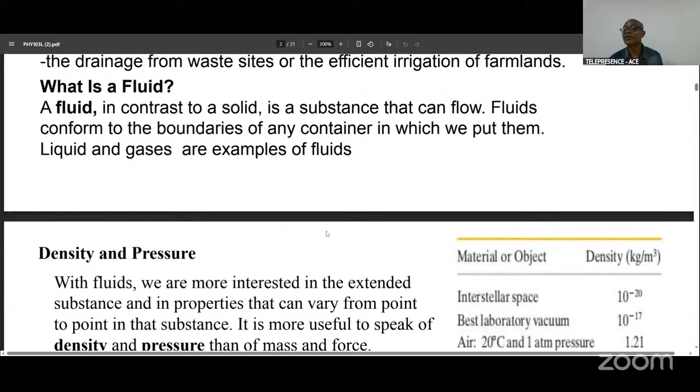Good morning, class. Sorry for that delay. Today, actually, we'll be interacting more, trying to put to action some of those expressions that we have already, getting you acquainted with them so that you are good to go by way of being able to use them effectively to solve questions. So let's try to complete our slide.

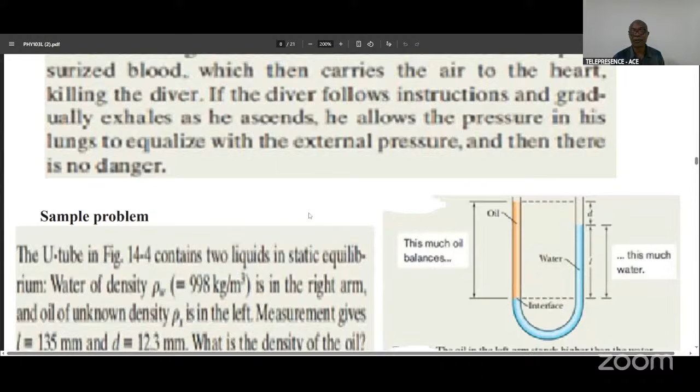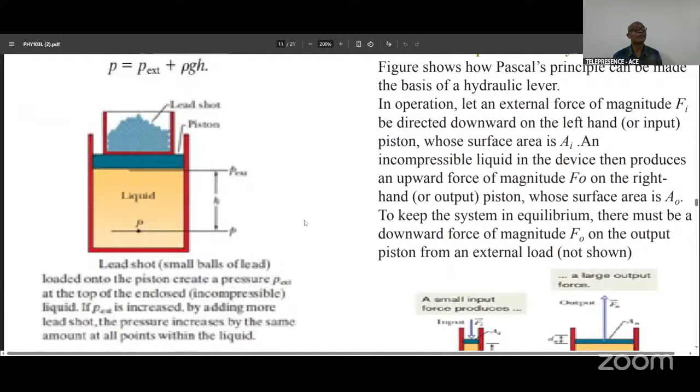And today will be very, very important, at least for as many of you that are able to actually attend the lecture. Because really we'll be taking time to solve some problems, problems that I know will be very useful for you. Problems that will be very relevant, that if you remember it will help you. So we are going to slide.

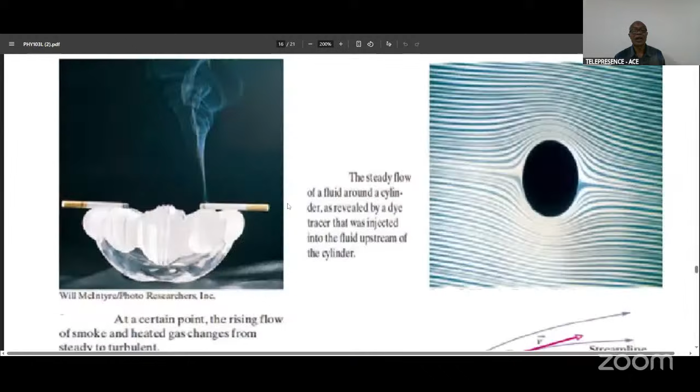Last time when we were having a lecture, there was a power outage. I pray there won't be power outage today so that I can have a smooth lecture. Towards the end of the lecture, we had a power outage.

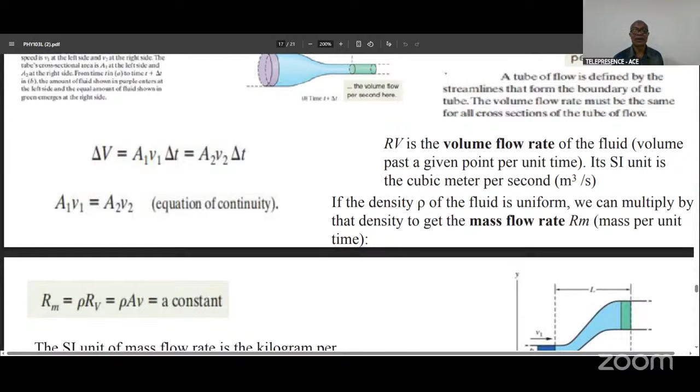So this morning, we'll talk about the flow rate being constant, arising from the equation of continuity. And then, of course, we also have the mass flow rate also being constant. So these are the two equations that we have on the board.

Equation of continuity trying to tell us the volume flow rate, and then the other one talking about mass flow rate. And of course, the SI unit of mass flow rate is the kilogram per second.

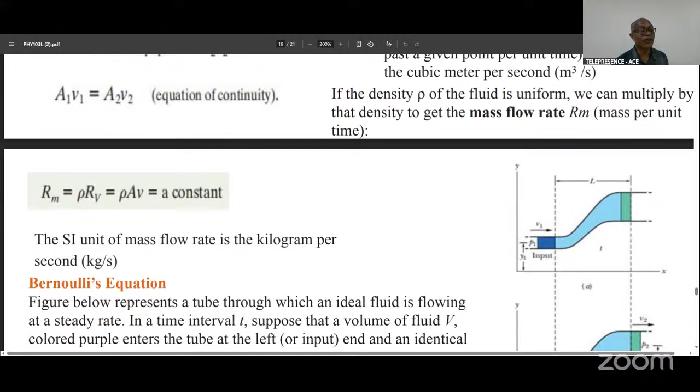Okay, so let's move on. So we have the mass flow rates, and that takes us to what we call the Bernoulli's equation. It's applicable to what we have on the right. I have a figure on the right hand side, and that figure is trying to show the flow of fluid through different sections and elevated at a particular height, y. That is, one is on one level, the other one is on another level.

So you can see there that we have the blue part, the deeper blue. That's where we have the input. You can see the level, that's y1 in figure A. After moving the distance L, that's capital L, it has now moved to a higher level, say y2. That is at an instant t, and then at a later time of flow of that fluid, at t plus delta t.

So if you look at the volume V, colored green in the figure, it emerges at the right end. The emerging volume must be the same as the entering volume because the fluid is incompressible, with the same constant density rho.

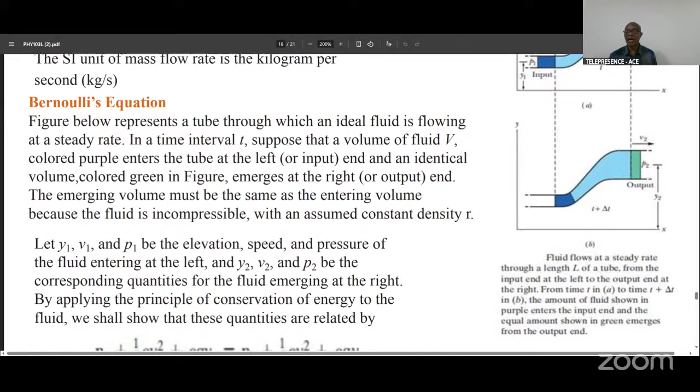The amount of fluid shown at the input will just be equal to the amount shown at the output end. So in A, we have the input end, and then in B, we are looking at the output end. So there's an equation due to Bernoulli, and that equation says the pressure at level 1 and the kinetic energy density at that level plus the potential energy at that level.

So Bernoulli equation, you must take note of that, actually tries to relate pressure with kinetic energy density and potential energy density. I'm saying energy density because instead of using mass, as we all know, for a solid, when I want to write the kinetic energy for an object, I just say half mv squared. But if I'm talking of a fluid, it's not just that mass, it's mass per volume. And mass per volume is what? Rho. So instead of M, I'm now using rho.

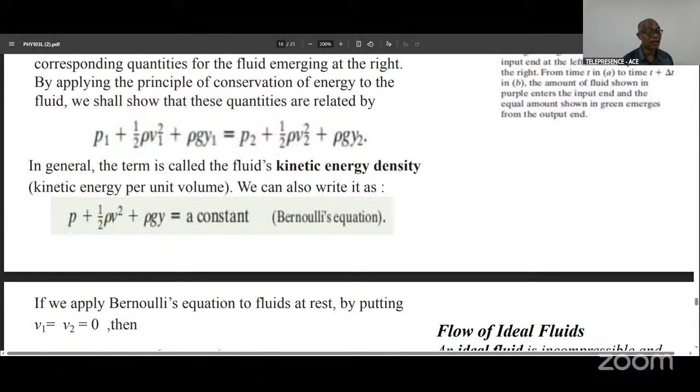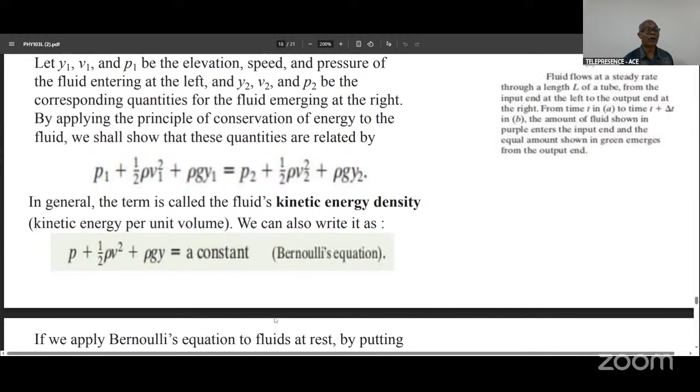And of course, again, if you apply Bernoulli equation to fluid at rest by putting, say, velocity is 0, what happens? Let's go back to this expression. In this equation, if the speed of the flow were to be 0, at rest, this expression will reduce to our previous expression. Do you agree with that?

Because I will transfer the potential energy density to the right-hand side, and the pressure to the other side, and the kinetic energy density will be zero. So what is left is the potential energy density on the right-hand side and the difference in pressure on the left-hand side. And that will be like what we call the gauge difference or the gauge pressure. In which case, let me try to write that expression.

I don't know if you can see the paper I'm holding. Can you see the paper I'm holding? I want to write something on that paper so that you can see. There's an expression I want you to be conversant with, and I'm going to write it on that paper. I don't know whether you can see this. Change. Can you see what I wrote there?

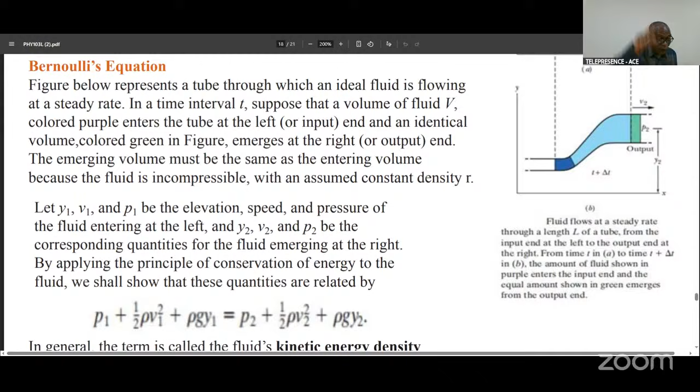That is change in P. Change in P is equal to rho GH. What I want to just say is this expression is similar to the expression we saw before. Let me show you the expression that is similar to it that we had before.

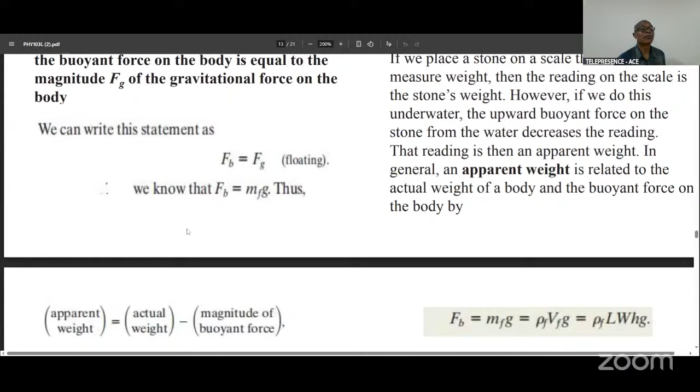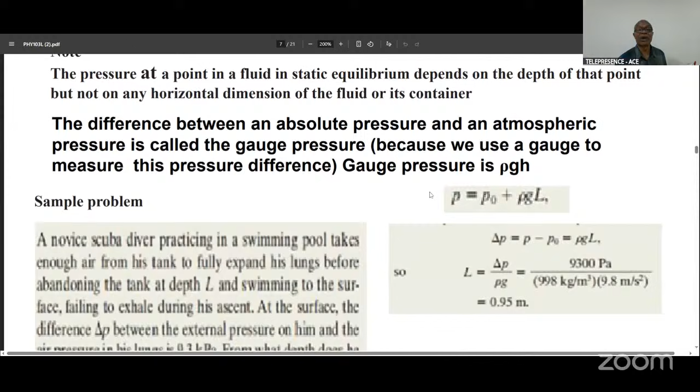We have an expression before that is very similar to that Bernoulli expression. If the fluid is at rest, it's just similar to what we have here. I don't know whether you can see what I'm trying to put the arrow for you to see. That is, in that Bernoulli, we are saying P1, this is P2, and V is 0.

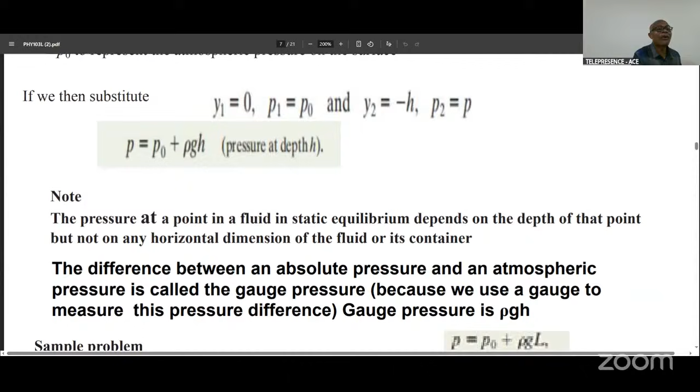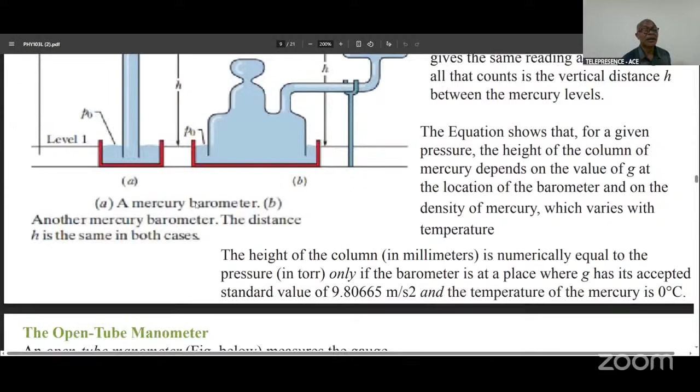So by the time you take rho G Y1, you take it to the other side, it will be rho G (Y2 minus Y1). That is, you factor out the rho and G. So Y2 minus Y1 is just H. So this expression that we have here is a consequence of, or is inherently embedded within, the Bernoulli equation.

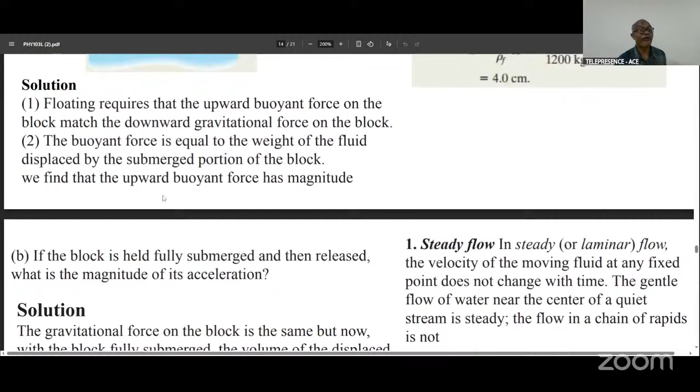So the Bernoulli equation is just a general form of equation that before now we know very well. And the equation I'm showing you is the equation you need to solve problems. Many of the problems that you will come across under my own topic, you need that expression to solve.

So this expression due to Bernoulli, if I take, I don't know where I can see my arrow here. Can you see the arrow? The arrow.

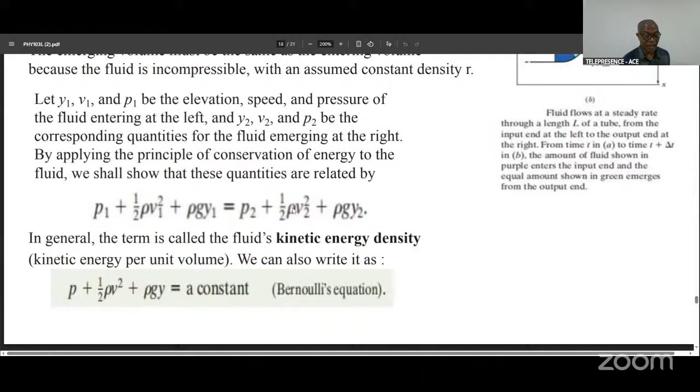That is the mouse. So if this is 0 and this is 0, that is for fluid at rest. So if I take this rho G Y1 to the right-hand side of the equation, I'll factor out rho G. I will now have Y2 minus Y1, and Y2 minus Y1 is just H. So I will now have something like P1 equals P2 plus rho GH, like what we have before.

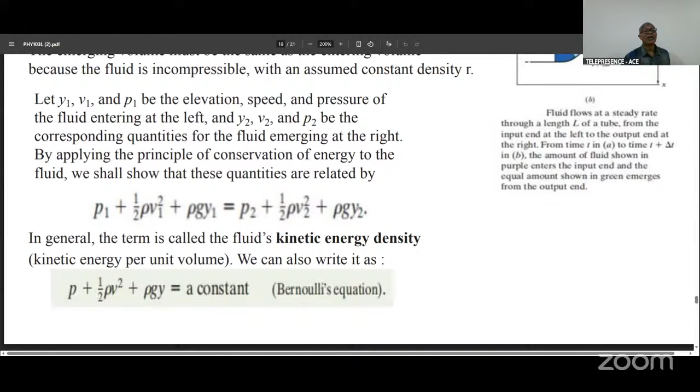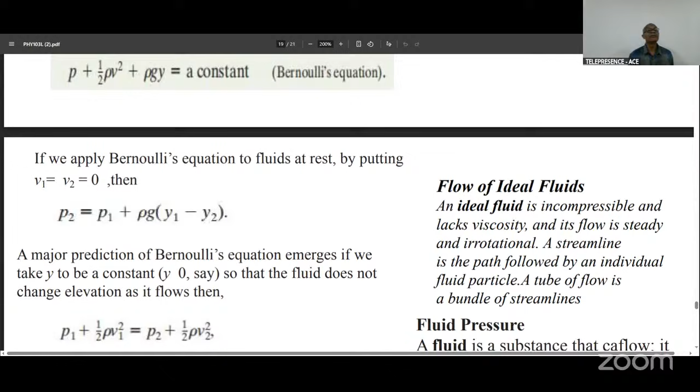So that expression, I must know how to write it very easily. And the Bernoulli expression also, I must know how to write it. So the Bernoulli equation for fluid at rest is just like what we have before. Okay? So a major prediction of Bernoulli's equation emerges if we take y to be a constant, so that the fluid does not change elevation as it flows.

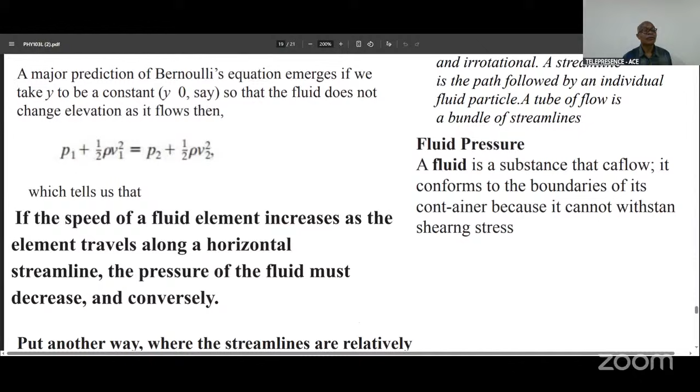So, what is that telling us? We now have the pressure plus kinetic energy density being a constant. That is, at one level, the pressure plus the kinetic energy density will be equal to the pressure and kinetic energy density at another point. So this expression explains that: if the speed of a fluid element increases as the element travels along the horizontal streamline, the pressure of the fluid must decrease, and the converse is also true.

If the speed of a fluid element increases as the element travels along the horizontal streamline, the pressure of the fluid must decrease. In another way, where the streamlines are relatively close together. You understand what I mean by a streamline now? The path of an element along the flow of the fluid, and the velocity is tangent to it. I hope you still remember; we dealt with that in our class, I think on Monday.

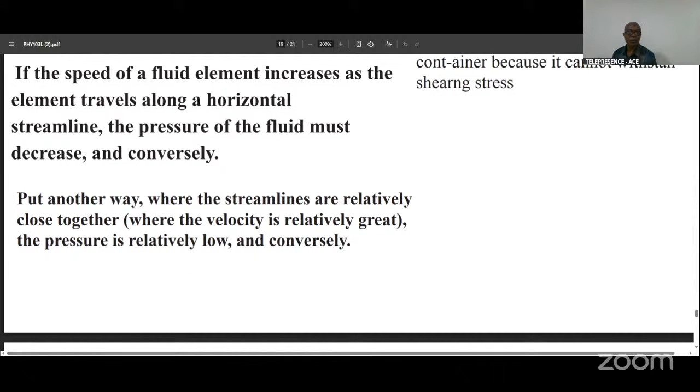So, where the streamlines are relatively close together, the velocity is great, and the pressure is relatively low. Do we agree with that? Where the velocity is great along the flow, we are saying the pressure is very low. That's from Bernoulli. Okay?

So for an ideal fluid, we know an ideal fluid is incompressible, having a constant density, lacks viscosity, that is, there is no friction, so it's a smooth flow, and its flow is steady, that is, constant speed, and of course, is irrotational. And again, we define a streamline as the path followed by an individual fluid particle, and a tube of flow is a bundle of streamlines.

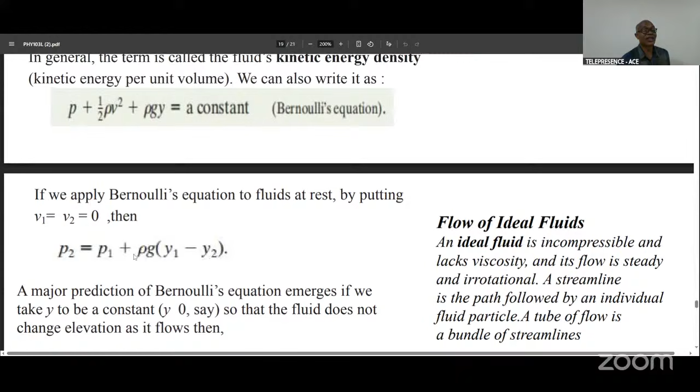And of course, from what I asked you to write, you can see clearly that what I have in the paper, or what I now dictated, is like what I'm pointing to here. Okay? It's like what is there. I hope you agree. This one: P2 equals P1 plus rho g times Y1 minus Y2. It depends, maybe you can say Y2 minus Y1; it depends on the way the question is. I hope you understand what I'm saying.

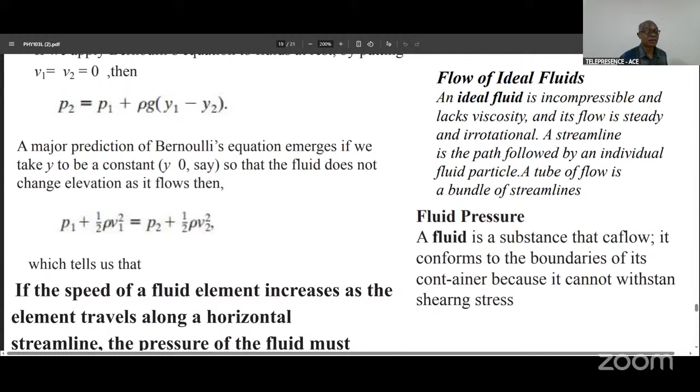And like I told you, in certain questions for you, as an examiner, you know I'm an examiner now, I'm the one to give you questions. So if I want to set 10 questions for you, I will set like 4 that will be based on statements like the following. All these are statements, all what we have on the screen. Those statements you must know them. If you don't know them, some of the questions you won't be able to solve. So if I'm to set 10 questions, I will set questions that border on statements, about 4 or 5. And then the remaining will be questions we have to solve.

And many of the questions for us to solve in this class, many, I'm not saying all, border on this expression. We know that expression long ago. In fact, many of us that were very good at our own level, we know them. The pressure at a given depth is rho GH. But that rho GH is when I'm talking of pressure at that point. But actually, most times what we look out for is change in pressure. That change in pressure is rho GH. So P2 minus P1 is equal to rho GH. And so therefore, I can rewrite it and say P2 is equal to P1 plus rho GH.

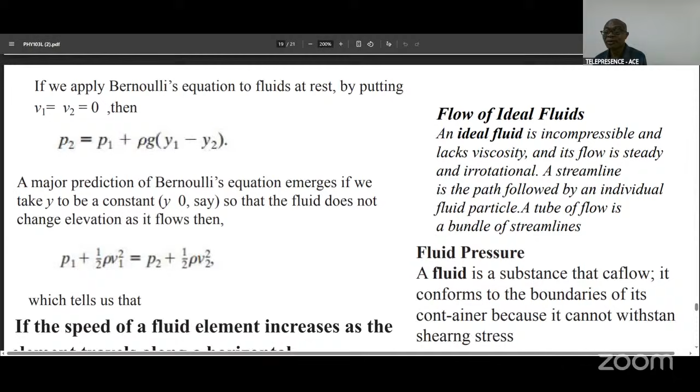Density is a constant. And of course, we can actually deduce our gauge pressure from Bernoulli's equation. If we assume that the fluid is at rest, the term for the kinetic energy density will disappear. So the only surviving terms will be pressure and potential energy density. And by the time you look at the 2 levels at different points, what you have will just be the gauge pressure. That means change in P equals rho G H. Okay?

Please, any question? We are rounding up. I'm trying to read from your chat. Okay. One of you even helped others to write the questions, especially the first and the second. I don't know whether you were able to get the third one. Okay, let me give you the third one. It's like you didn't get that. Abolaji and then Abidoyi, 2 of you were able to